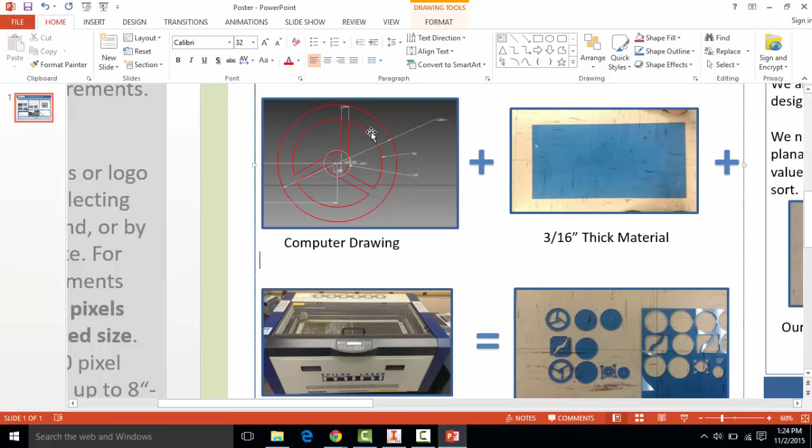Now, let's just take a look at an overview of how the process works, a little flowchart I have here. This is an example of a computer drawing that I had made in the past. It's a screenshot of an object I've had in Inventor, and this is a wheel. It kind of looks like the Google Chrome symbol, and I've drawn it, and I wanted to attach it to a robot I was building at the time. I had this 3/16 inch material, and finally here's the laser cutter itself. Combining all these three things together, you get these parts. This computer drawing corresponds to the top left part here, and you can see they really are cut directly out of the stock material. This kind of hopefully will help you visualize what the 3D process, what the laser cutting process looks like.

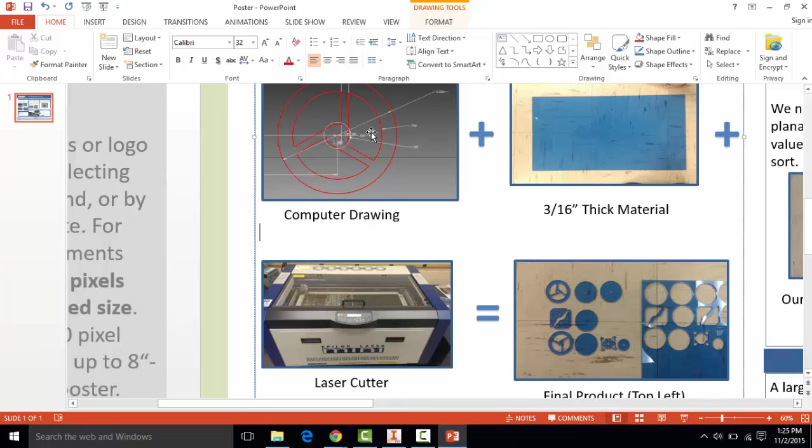Now let's go into Inventor. And I don't want you guys to worry about following along. This is just an intro. All the how-to videos are going to be coming up later on.

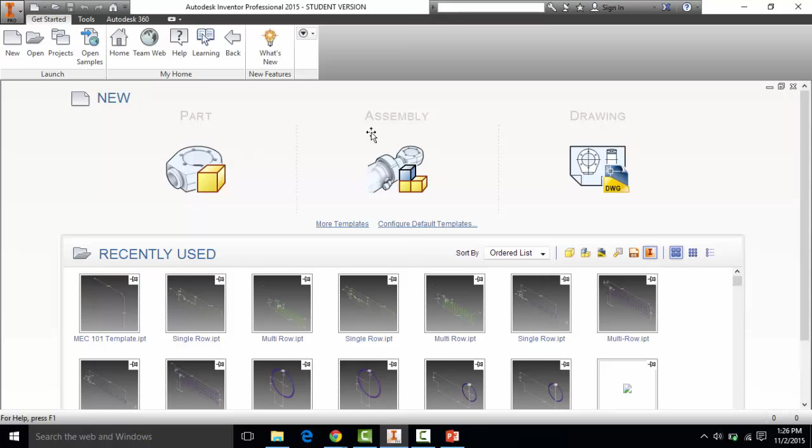This should resemble the screen you get when you open up Inventor. Inventor is a computer-aided design, or CAD, software. With software like this you can create clear and well-defined parts that are easy to edit and that you could send to a manufacturer to produce, or to an engineer to review. You aren't just limited to parts either—you can create multiple parts and assemble them, or even create an entire machine. But we're just going to stick with part files for now.

Let's click on New, and we have 3 part files here. We also have assembly and drawing files, but we're going to exclusively work with part files. You can see we have 3 different part file formats: the MEC 101 template, which we've created specifically for this class; the sheet metal template, which you should not use; and the standard .ipt template, which is acceptable but not as convenient as the MEC 101 template. So let's just select the MEC 101 template.

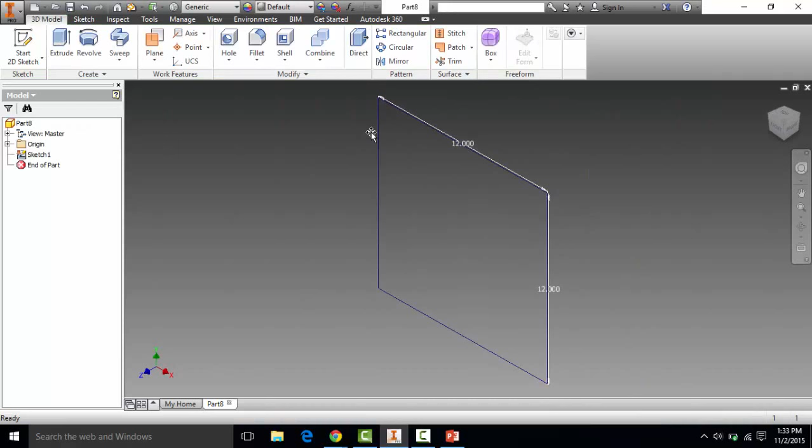You can download this template online—we've provided it to you. This template already comes with the 12 by 12 rectangle that you guys will have to fit all your parts inside. So here's the one technical thing I do want you guys to take away from this video.

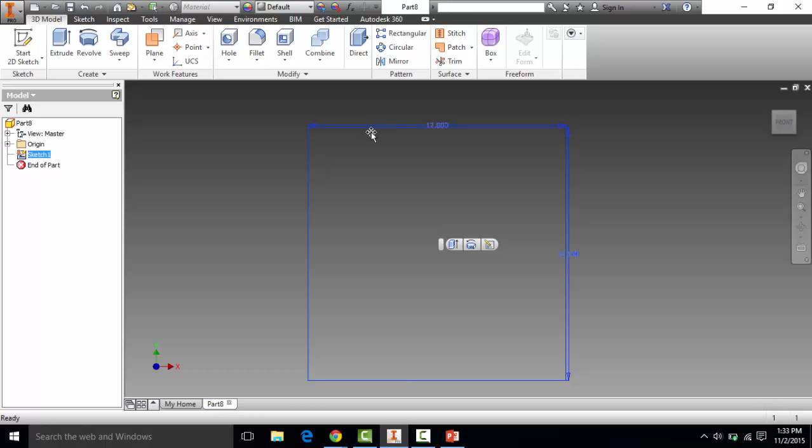To enter a sketch that's already been created, just double click on it—well, don't double click on the name, double click on the icon. Now we're in the sketch, and we know we're in the sketch because it says 'finish sketch' with a little check mark, which is only there when we have the option to finish the sketch. We also know we're in the sketch because it's green, which means we're good to go with our drawings.

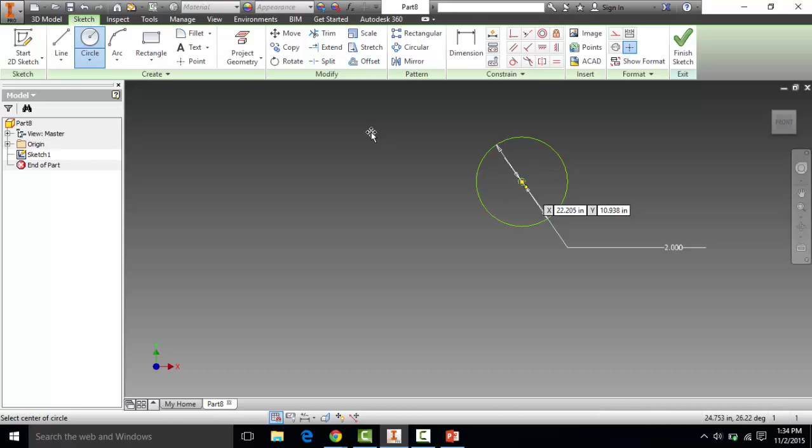So here's something we could make if we wanted to make a wheel, for example. Don't worry about following along, I'm just showing you an example. We could make a 2-inch wheel that has a shaft size of 0.16, and that's going to be a very common number you'll see, because that's the diameter that fits the number 8 screws you've been provided. The number 6 screws can also fit inside, a little loose, but 0.16 is also the size for the blue Vex hinge joints you'll be given.

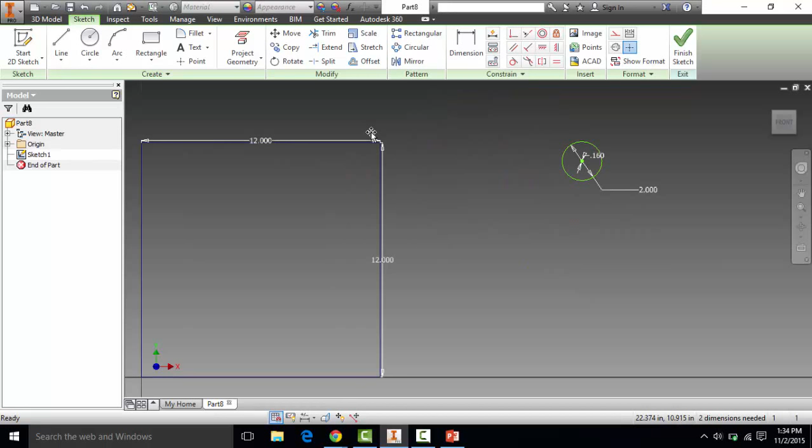So now we've made a wheel, and maybe this is a wheel you'd want to use for your robot. When you send us the file, just take all your drawings that you've created and move them into the 12 by 12 rectangle. Then if you were to send us this file, we would cut this wheel for you. You just continue this process.

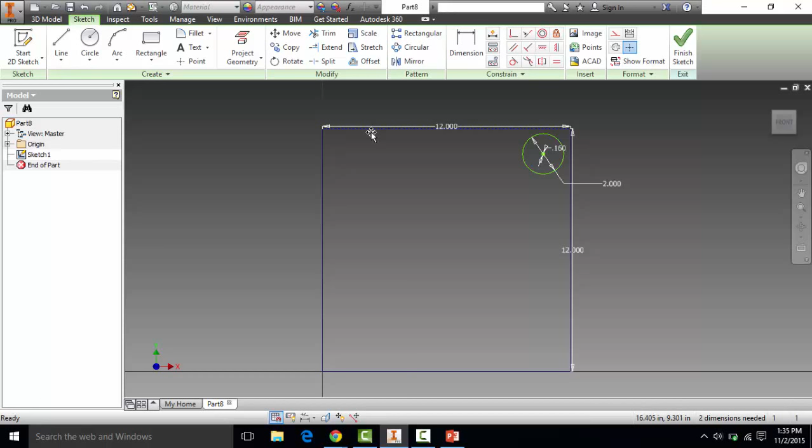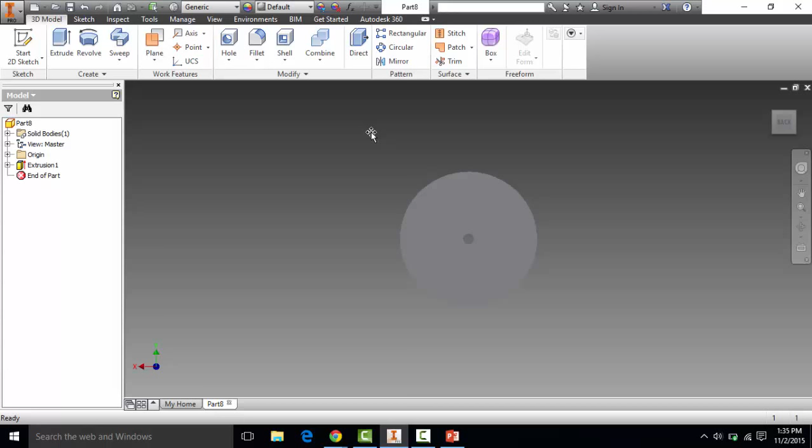So just keep all your parts in all the files that you send us as 2-dimensional files, and you'll be good to go.